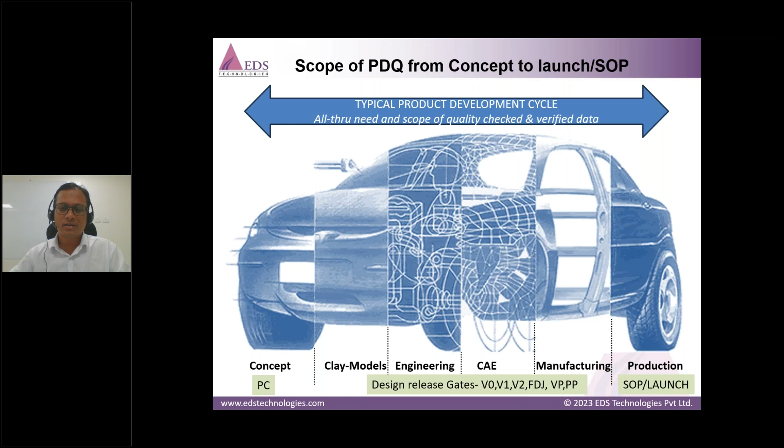Now, in industry, we always say that CAD is the master. It's a buzzword. Everyone talks about CAD, and CAD is the master, like a single language spoken in any industry. Why it is important is that it's at the center point of all the activities, with a lot of peripheral teams concurrently working on the data. The data released can be used by tool makers for making their tools. The prototyping team can make use of it. The tolerancing team can make use of it.

But imagine if the data is not of the right quality, then all these stakeholders will have their activities stopped due to the absence of quality data. So the requirement of quality data starts at the very beginning of the product, and it ends with the product life cycle.

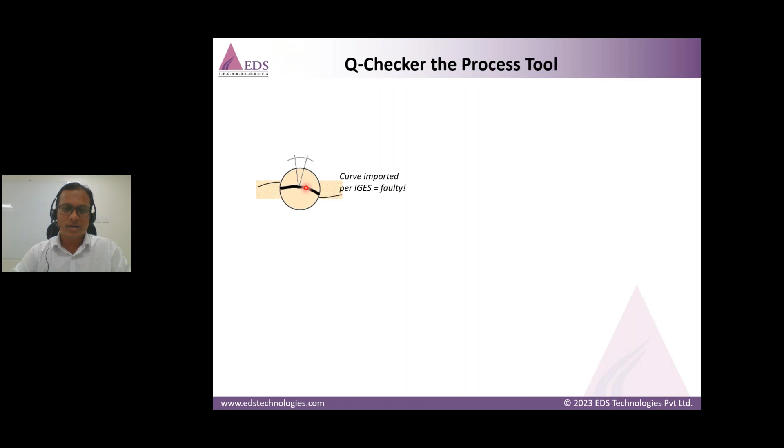Let's take a small example here, a very classic example of how product data quality starts deteriorating in the very first phases. Now, imagine we have an imported curve. Maybe you can consider a door shut line in the car or something like that, and it has some connectivity issue here, like tangency or curvature connectivity, and we didn't notice it. We start engineering the components based on this curve. We make a surface out of it.

Then we do a lot of surface operations. We make a trim or maybe a final output of the surface. Then we have another final output that can be thickened, and we make a final product out of it, which is the final CAD delivery from an engineer.

So what will happen is, if this is not noticed in the very beginning, it can be noticed by the tool maker, who will make a tool out of it, and he will do some tool path generation and machining operations, machining programming, and there he will notice some discontinuity here. So he will ask the designer to rectify this discontinuity and re-release the data. So there is some time associated with it, to repair.

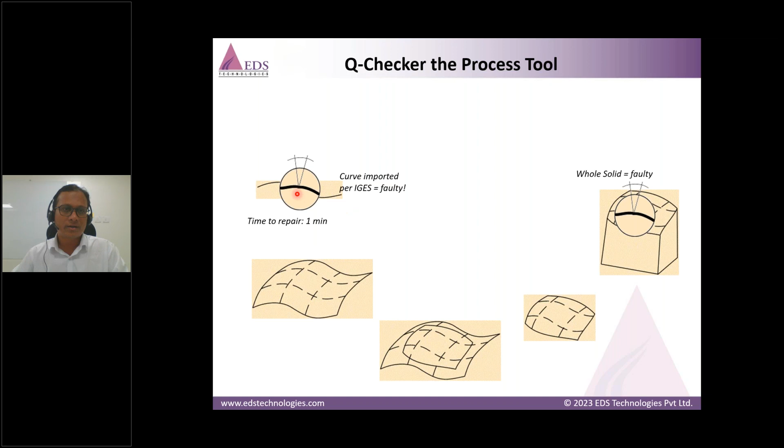If it had been noticed in the very beginning, it could have taken just 1 minute to repair it. If it had been noticed at the surface level, it could have taken 5 minutes to repair it. But if it is noticed at the tool level, manufacturing level, then it takes weeks and weeks and months to rectify the data due to this huge involvement of the process. And it is just one part. Imagine a number of parts put together. So you can imagine the time and cost involved in rectifying the product due to the faulty model.

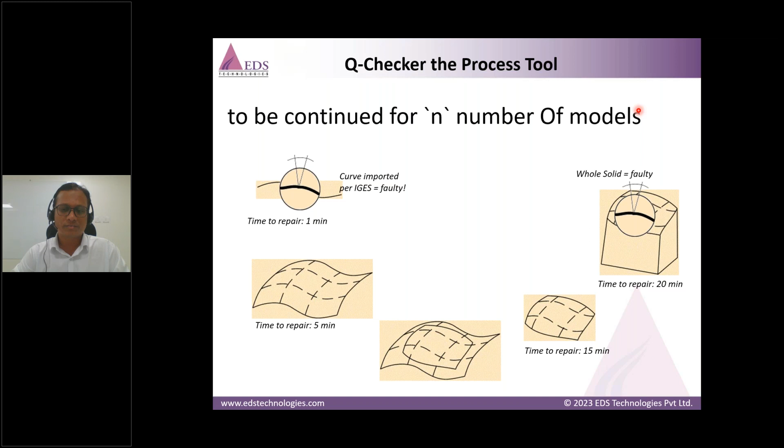We do manual checking as of now in the industry. So this is the way we check our data in the industry nowadays. We have a release checklist, we have a delivery checklist, and we have a drawing checklist. But there are some issues associated with it. It is a completely manual checking process. It's repetitive, it's monotonous. Then it takes a lot of the designer's time, which otherwise he could spend on the actual CAD design work, and focus on the real work.

So this is actually a do and check method, which is a reactive method of doing CAD modeling. However, we should go for a check while doing method, which is a proactive method of modeling. And QChecker helps in achieving this check while doing methodology. Many designers who are freshly inducted in the company may not be aware of any such tools that are available, so they can make fresh mistakes while CAD modeling. And of course, during release pressures, we always say that there is no time for PDQ. We have to just do our work. So that's another excuse.

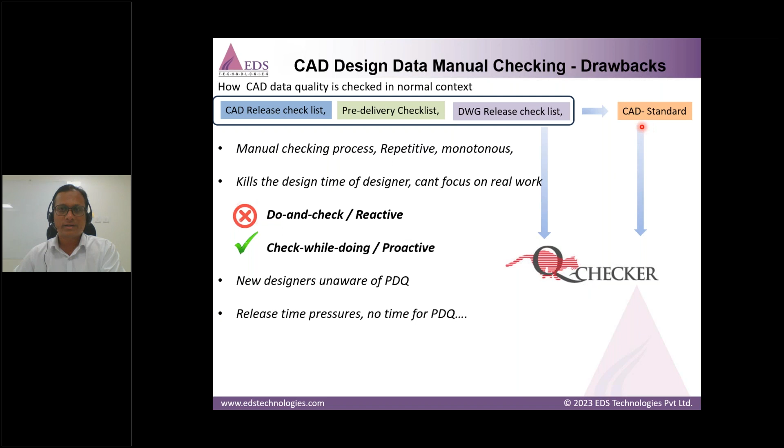But what can be implemented is, we can take all this and make a company internal standard and have this standard implemented in QChecker. So if there is a standard, it can be implemented right in QChecker, and the checklists can also be built in parallel in QChecker as a number of checks. So we ensure the CAD design quality during CAD modeling itself and not check afterwards. So that's the proactive way of doing CAD modeling. And there are around 400 checks in QChecker written by the expert CATIA team within Technia.

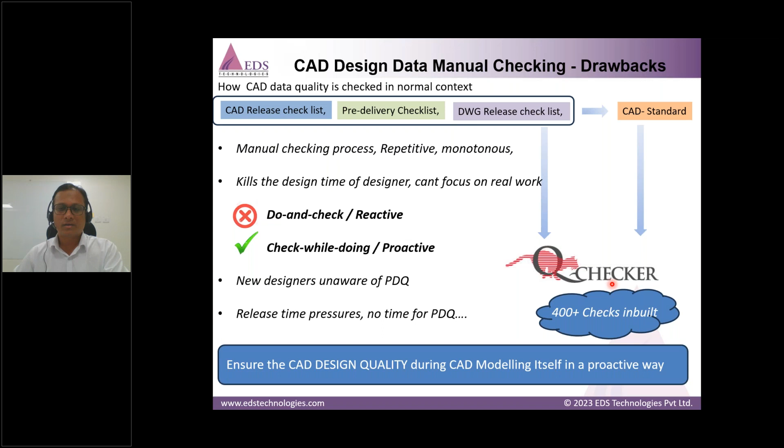Let's take some sample case studies from industry, real life examples. There is a check in QChecker that checks if a specific parameter is available or not. And if it is not there, it can give it as an error. So, for example, if you give this parameter, paint offset value, suppose the paint is around 300 microns thick on the body.

So you can limit that value here, and the paint shop engineer who will do the costing calculations for paint will be able to know the paint quantity and paint weight that will be going onto the body and the cost associated with it. But imagine if this parameter is not there and QChecker doesn't check it, then there is no chance to know the paint weight and the cost associated with it. So we can implement such very advanced level checks with QChecker, checking if certain parameters are available or not. This is just one example of it, which we have faced in the industry.

Otherwise, the other way of doing it is that the paint shop engineer has to open the data, measure all the surface areas, offset it by 300 microns, thicken it, and measure the volume of it. That's a very cumbersome process, but you can just do it with the help of one parameter.

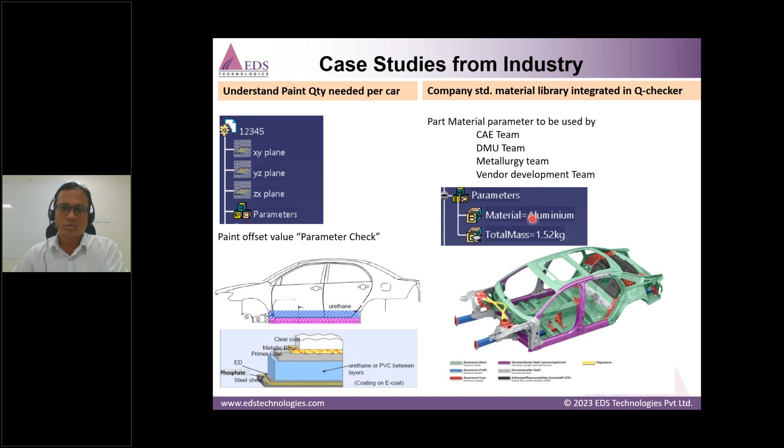Another example: ED coating, electrodeposition coating on the body, very important - it acts as a protective coating. We can have another parameter for it that can measure the surface area of the product, and by that we can calculate the total mass of the coating that will be going onto the product, for example the body here. So the simple QChecker check can be if this parameter is available or not.

And if it is not there, the designer has made a mistake not implementing this check in the CAD model, so that can be triggered as an error in the QChecker, and that can be picked up and corrected.

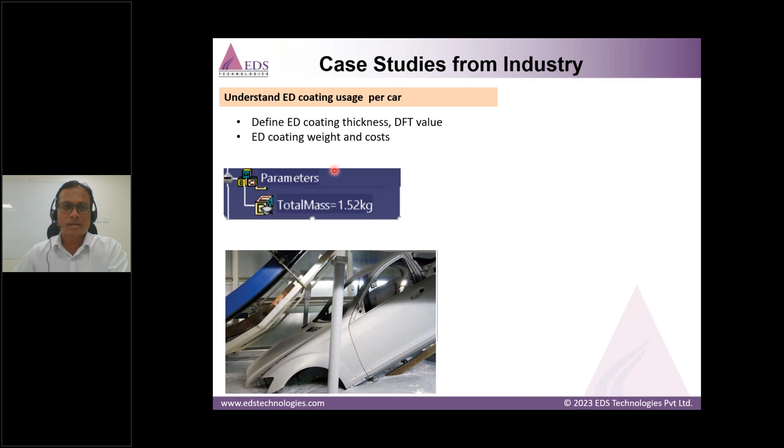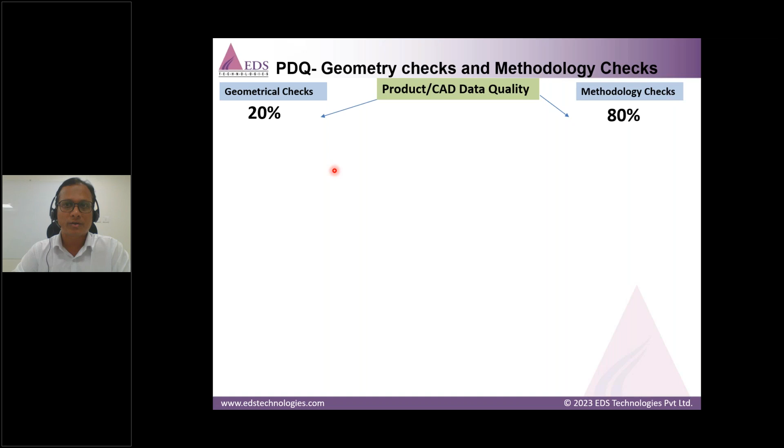What PDQ constitutes is a kind of geometry checks and methodology checks. Geometry checks are only 20% important, but 80% importance is given to the methodology checks that I just mentioned in the above slides. So what are the geometrical checks?

Basically these are simple checks, but very important. Position sketches - as we know, sketches have to be position sketches, and free sketches should not be used, because free sketches can turn upside down, left to right, and create a mess with the part. We should always go for an axis system while creating the part, because the whole part can then be derived from one single point. So Q-checker can check whether it is a position sketch or not, whether the axis system is given or not.

It can limit the size of the model so there is a disciplined approach by the designer - you cannot just make more and more operations and increase the part model size. Then there are checks to hide all the points, curves, lines, planes, etc. before saving, so that our model looks clean when opened in JT or other lightweight applications. It can check whether there is any deactivated feature that the designer has left to update.

And lots of datuming features - it can check the datum sequence of the GD&T symbols also. It can check whether the designer has made some mistake giving fake dimensions. So these are all geometrical checks, but they're only 20% important, while 80% importance is given to the methodology checks I spoke about in the first couple of slides - like paint offset parameters, surface area parameters for ED coating, weights, etc., and whether the material applied is correct or not.

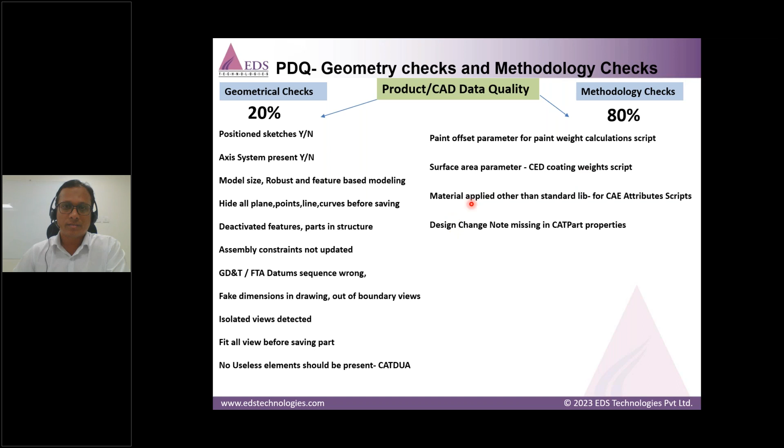Let's move ahead and check another example, a very classic example from Europe. A company in Europe had around €5,000,000 being spent in 1999 when they started, and the management thought it's a very high cost, so they implemented the product data quality philosophy in the company.

They implemented QChecker in 1999, and in the first year there were no apparent gains because there were fewer users using QChecker - not all were trained. So even then the costs were too high. But as the number of users increased, more and more designers started using QChecker across the company, across all functions, then the repair cost started decreasing and the maturity of the product started gaining.

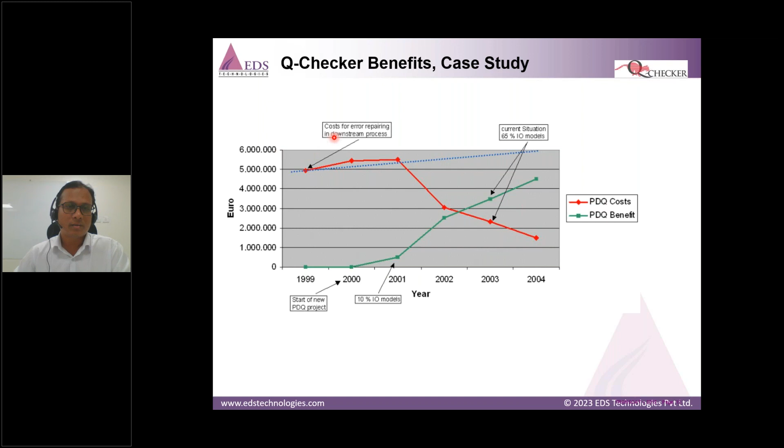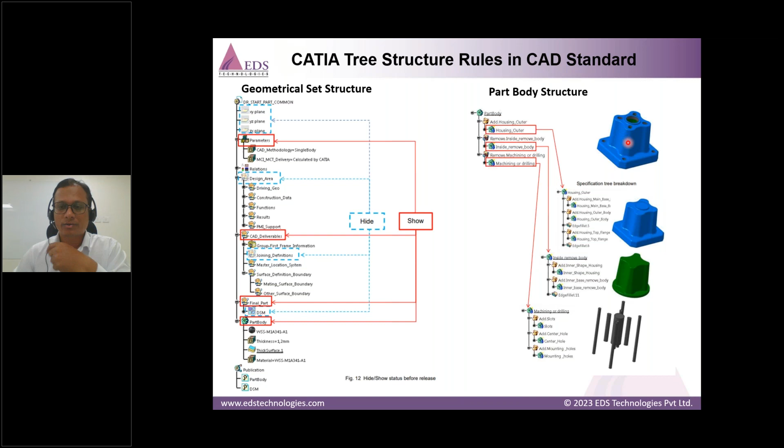Another modeling methodology, like I said before, all bodies should be named. There is a check in QChecker for whether the bodies have been named correctly or not, or whether it's just left as body 1, body 2. Because in a hurry, many designers make that mistake - they just create the body and don't name it. So any new designer who starts on it faces troubles while updating the component. QChecker can help in this methodology check also.

Let's look at some very interesting checks that QChecker can help you with in product development, saving the headache of maybe hundreds of designers at a time.

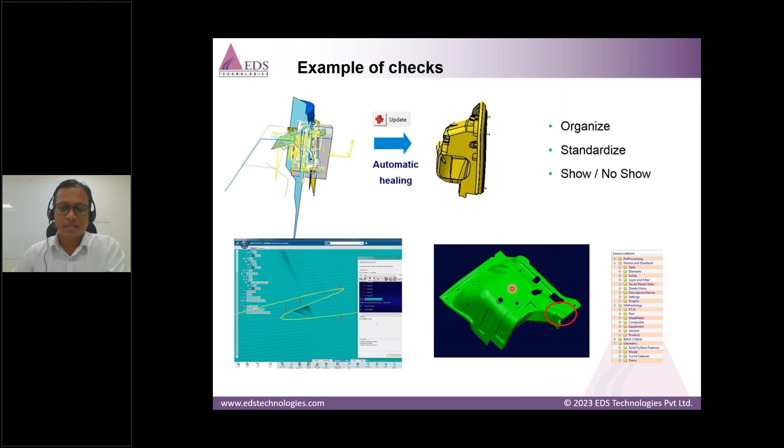Let's look at an interesting comparison of how we relate traditional methods to how we do things now. Previously we used a lot of 2D drawings, and cars were being made that way. In inspection, we used to measure with verniers and micrometers. Then came 3D coordinate dimensioning, which is easy to understand, explain, and communicate, with no problems - but this is still coordinate dimensioning.

On similar lines, we have release checklists and CAD standards in the form of Excel files, which each designer has to check his designs against to verify correctness. But these are old days, maybe 2-3 decades back - that's how business used to happen.

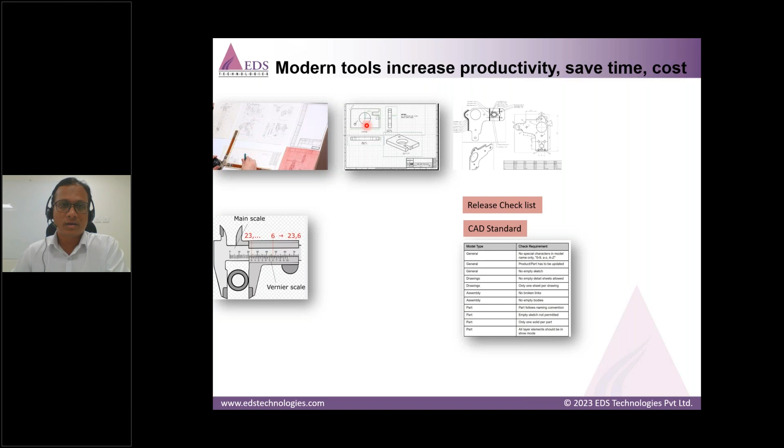But nowadays we don't do any 2D drafting - we always go for CAD design, which is a productivity improvement. Nobody now uses physical measurement tools; we all go for gauges and CMMs, etc. - another productivity improvement.

Similarly, for coordinate dimensioning, we moved to geometric dimensioning, which has a huge benefit of almost 57% more tolerance than coordinate dimensioning. That's why we get more tolerance to play around with in geometric dimensioning, so we easily adapted this modern tool of doing engineering.

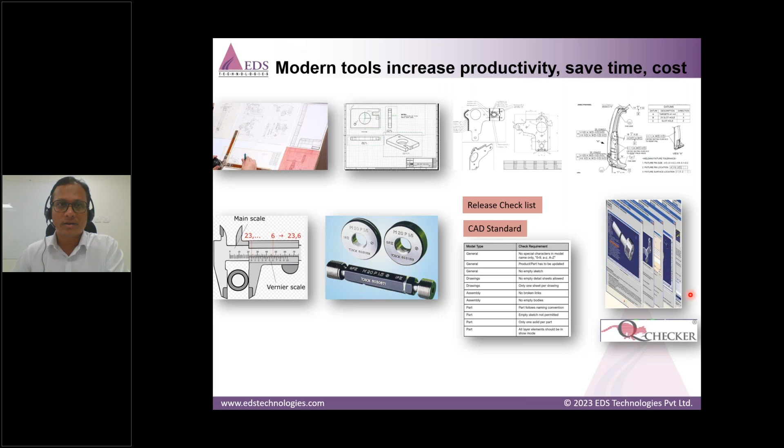On similar lines, what we offer with our product is that we can get rid of all this manual process of checking and losing time and effort. We can transfer this entire process to QChecker and let it handle all the checks itself, in a short period of time, very accurately, with a lot of checks performed inside it. I hope it makes sense as a modern tool to increase productivity and save time and cost.

Let's check some standard checks that are available. There are around 400 checks available in QChecker, written by expert CATIA users and the Technia team.

This is a solid wall thickness check, very important. It will give a band where the thickness is below a certain value, which you can set in QChecker, whether you want it 1 millimeter or 2 millimeter. Imagine this is a plastic component or a stamping component with a pierced hole, which needs a certain bridge amount, otherwise the dies can crack inside.

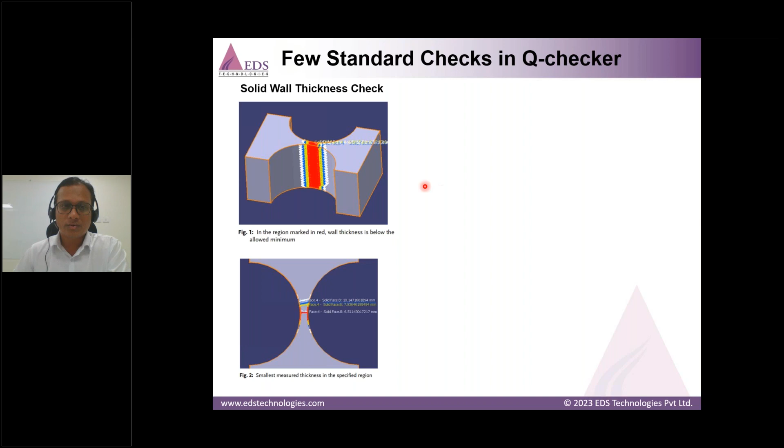So that kind of check can be available here. It's very useful for plastic components where we have variable thicknesses, and due to certain operations, the thickness can go drastically low without the notice of the designer. It's a very important tool, readily available in QChecker.

It has a check to check inside cavities and voids. For example, there's a connecting rod with a void inside. Imagine the repercussion of this: the weight of the connecting rod can be misleading due to this void, and the costing can go wrong, and even mass balancing can give very wrong results.

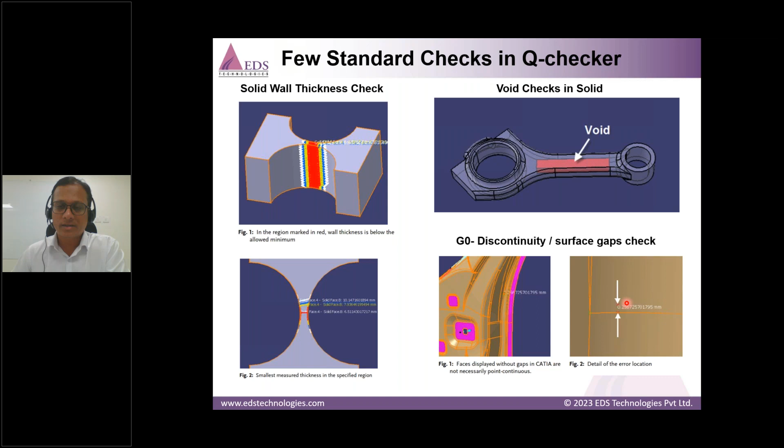There are some ready checks for checking discontinuity - G0 discontinuity, point discontinuities. There's a gap in this panel, the body side outer of a panel. There's a gap here, but the designer never noticed it. Nobody noticed until it got released and came back from the supplier, the tool maker, saying there is a discontinuity. Then he demanded a re-release of the part, which again takes months.

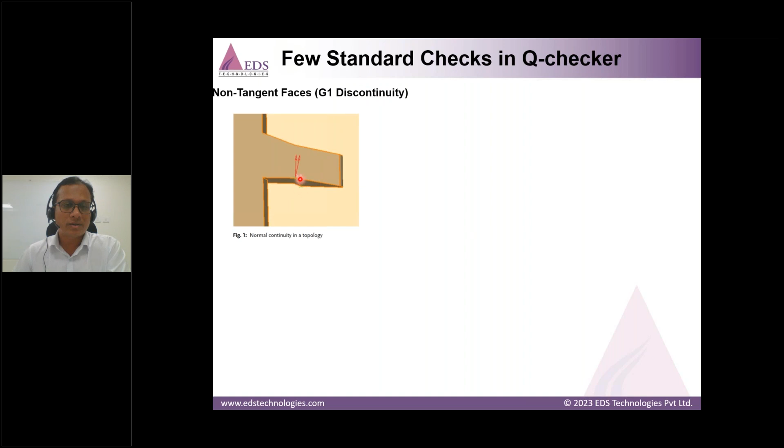Similarly, a G1 discontinuity here - there's a sharp line which should have been smoothened and filleted. It can check that also. Curvature discontinuity, G2 discontinuity, it can check readily. It's a ready check available.

Self-intersecting surfaces and solids can be readily checked with a click of a button. Very important, this is never noticed during the creation of the modeling, but it's observed when we try to thicken the component and do the object out of it.

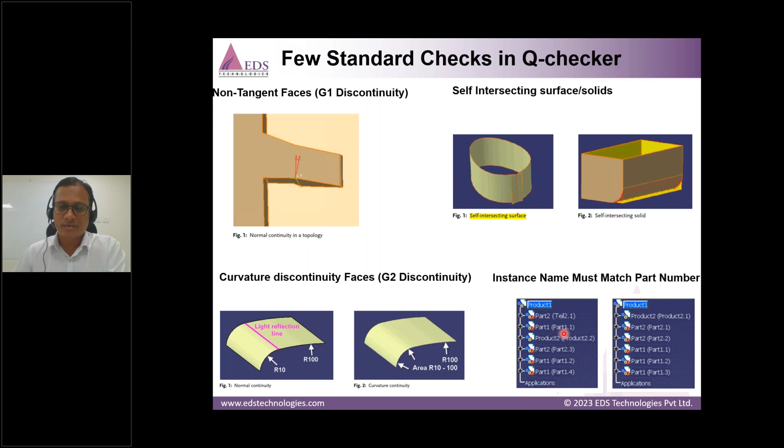Instance name is very important when you have a lot of parts inside the product and they are not arranged in the right order. QChecker, within a click, can create the right order of the component. For example, the instances have been named one below the other, so we know how many quantities are there, and we have a very clean structure inside the product.

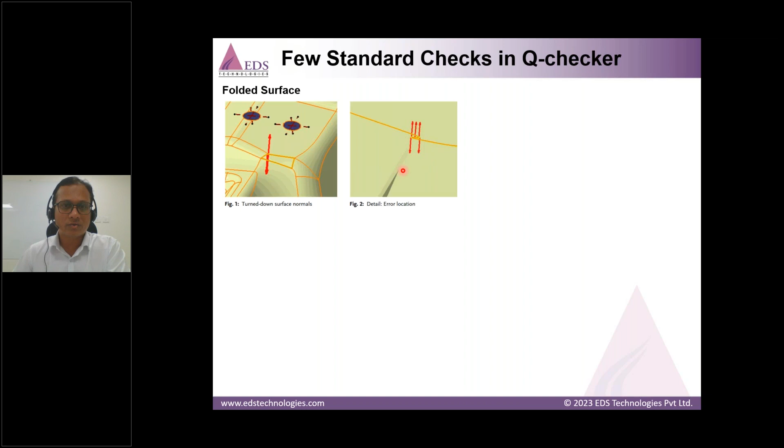Some other checks, like a folded surface here that the designer never noticed - however it came back from the tool maker saying the surface is not correct and the tool cannot be made out of it. This is a ready check available in QChecker.

Tangent discontinuity, G1 check, can be checked immediately as a ready check. Self-intersecting wires can also be checked. The designer never bothers about it, but it can be checked with the click of a button.

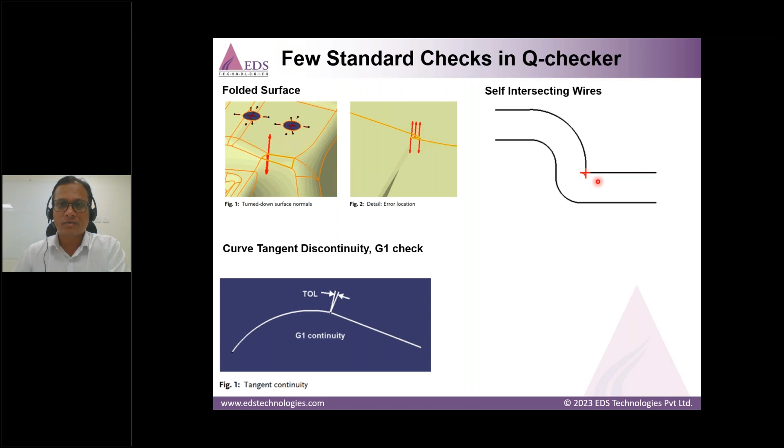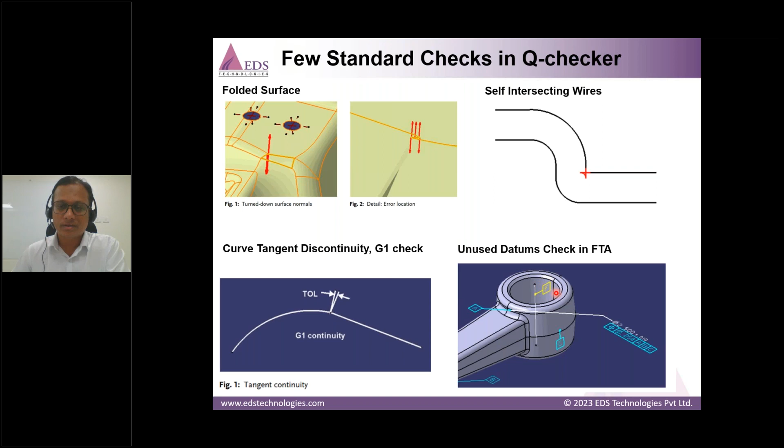There can be some unused datums, not used previously - the datum used to be like this, but due to a new dimensioning or tolerancing methodology or datuming system, the new system came in place and this datum became redundant, but the designer misses removing it. Q-checker can check the deactivated or redundant datums, and the designer can then remove it.

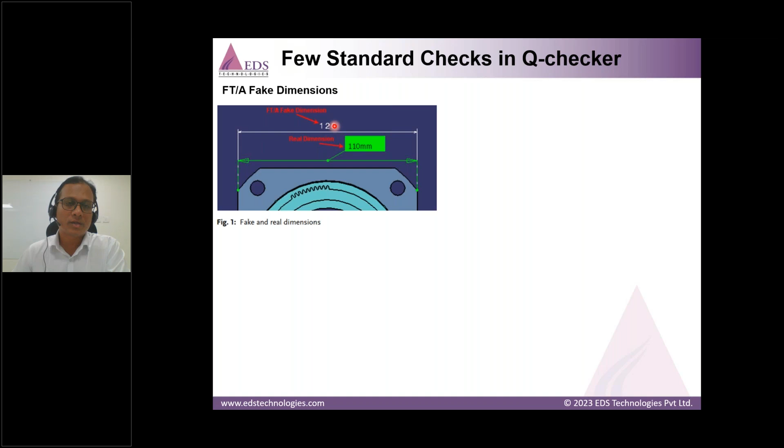Another one in FTA, 3D PMI or GD&T - a designer can give a fake dimension due to release pressure just to meet release timelines, but it can be checked very early in the process, so he's relaxed that yes, we can easily release the component.

In the captures also, in 3D PMI or GD&T, it has a ready check like the capture names must match the view names to maintain sanity, to make correlations between the two. Very important, very important this is actually.

FTA standards - any company can have maybe ASME. A lot of companies choose ASME Y14.5M GD&T standard, but some companies in different industries go for an altogether different dimensioning GD&T standard. So you can set your standard and check whether it's being followed in annotations, text dimensions, and text symbols, etc.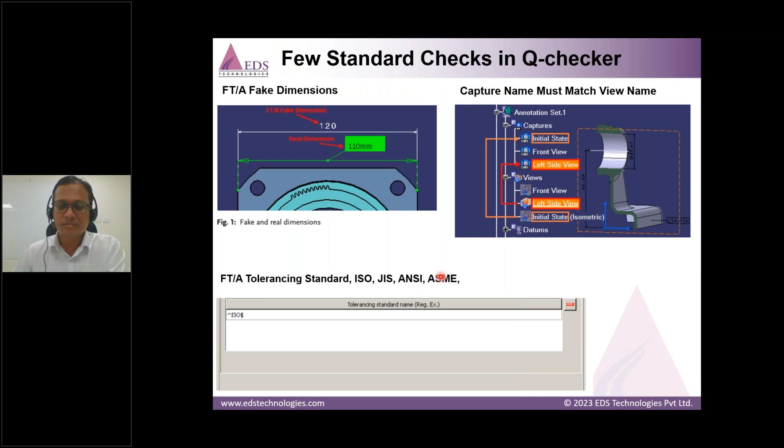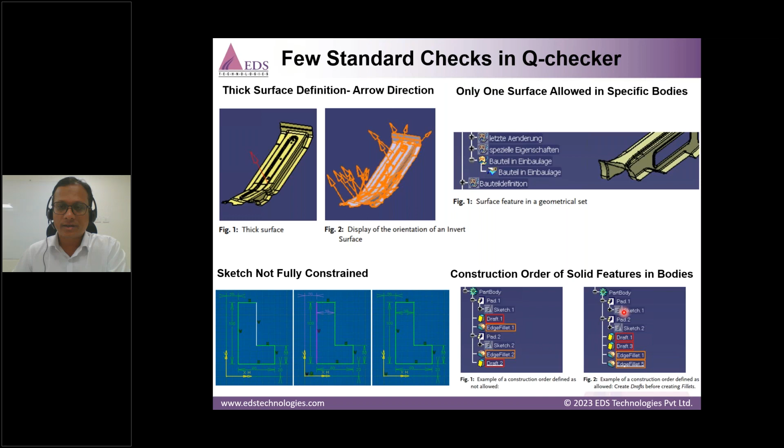Construction order: it can detect that the designer cannot really go for any haphazard modeling methodology. He cannot first fillet the component and then give the draft. It's a wrong method, so it can detect that sequence also very easily.

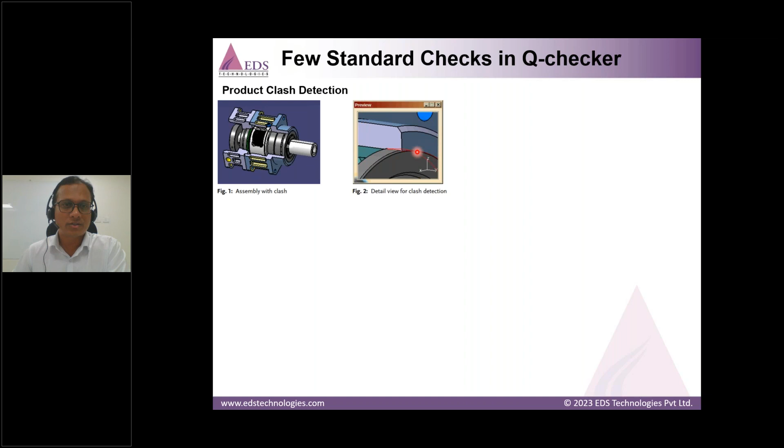Clash detection is one of the beautiful, very robust checks in QChecker, so it can check whether it is touching or clashing. No show commands, as I showed: if you click the healing button, it can turn this mess into a very clean model visible in the JT files or maybe lightweight applications.

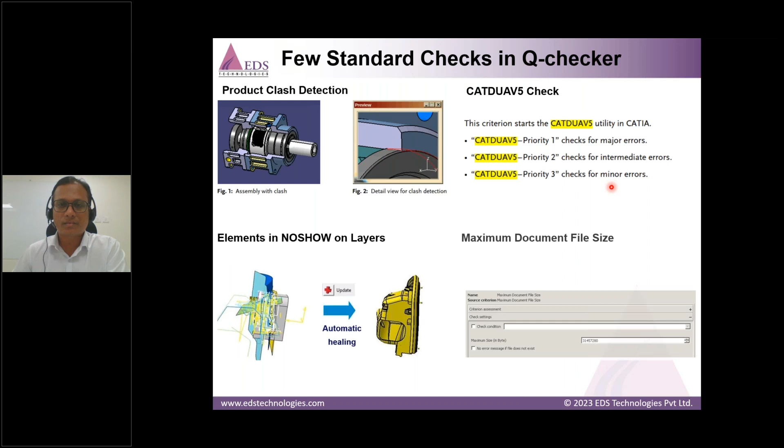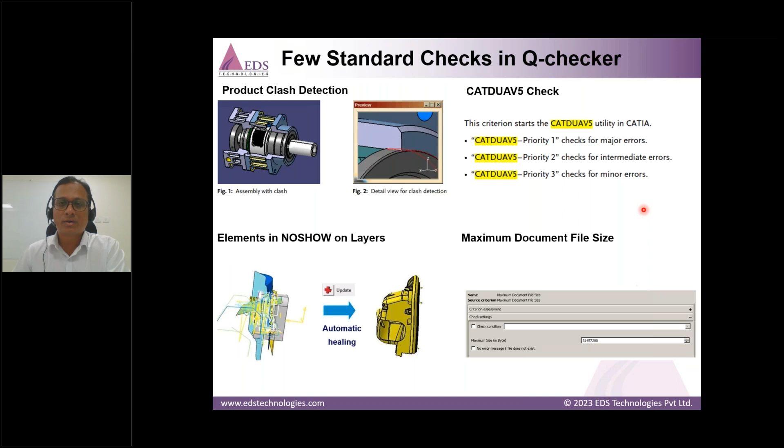Then, as you know, CATDUAV5 it can perform inside QChecker. You don't need to go for CATDUAV5 utility and do the CATDUAV5. You can repair all the major checks, intermediate checks, and minor checks inside the QChecker application. You can limit maximum part size to maybe 50 MB or 60 MB so that there is a discipline that is followed by the engineers to do the proper CAD modeling when they are modeling the components.

You can set the value that your company or organization chooses, like millimeter. He cannot give dimensions in centimeters or meters. So it all has to be measured in millimeters only.

This is very important, related to general notes in any drawing. Any product has a drawing and it has general notes where a lot of regulations, a lot of test parameters, a lot of inside company standards are written. So the company chooses to automate that all with the help of CATIA parameters, so that there is a check in QChecker that checks whether the text in the general notes is derived out of a CATIA parameter. So that linkage it can check.

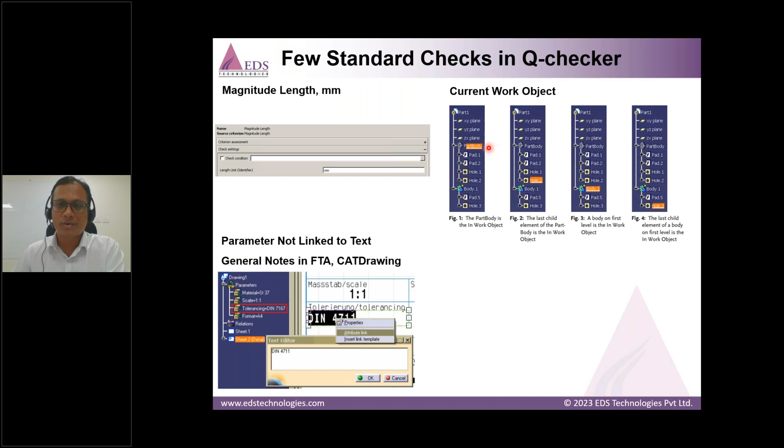Current work object, it is a very useful check. While designing the component, the designer can be inside. It should technically be over the part here to show the finished component, but he can be inside the model somewhere, and this data can go wrong if it reaches the supplier or tool maker. So it checks, and there is a healing option available. If QChecker notices it, by the healing operation it can make the part body the current work object.

It can check how much character length of a part number or part description you can allow. For example, 1 to 25. So this check allows just 25 character length of the part name nomenclature. So there is a disciplined approach while naming the components.

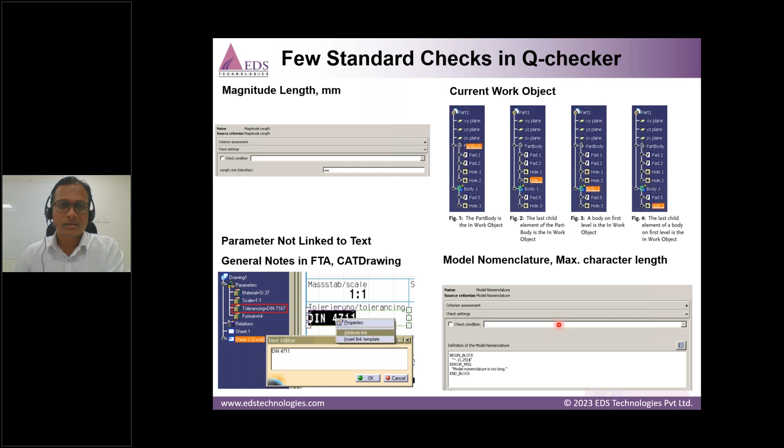Yeah, with all this, I hope I'm making the context very understandable. So let's check when QChecker got introduced, how it got applied and invented. There is a company in Germany, Technia, which is a developer of this software in conjunction with Dassault Systèmes, and it works primarily on the CATIA applications. It focuses on ensuring the quality and compliance of CAD data and models, and helps maintain CAD standards, detect early errors, etc.

In 1990, they started with very few checks, a very minimum number of checks just to validate the application. Then in 2002, a lot more checks were added, and it was made available for CATIA applications. In 2006, the standard components to embed QChecker in PDM started, and in 2007, QChecker 2.0 enhanced the interactions with results. The new 2.0 version released. And in 2009, it was made available for CATIA V6 to dedicated customers just for checking the primary usage.

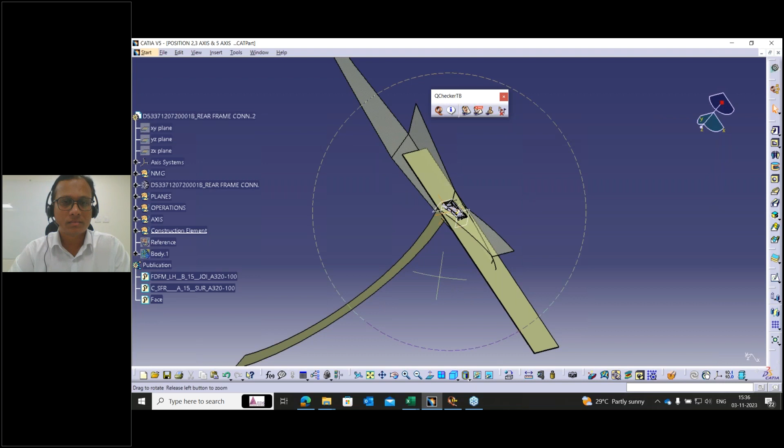For the live demonstration, let me go with a small example. This is a model for the rear frame connection part. Here I have created a body along with some operations, planes and axes, some publication elements and construction elements. With the help of this, I made a small machining part. We'll see how this PDQ system is helpful in terms of data quality. Let me run the PDQ system just by clicking this icon.

So we all know that every design company, manufacturing company, when it comes to method, we have a checklist. We have SOPs. When it comes to the design CAD data, we have a checklist. Again, it differs from company to company. Let's say a CAD system. These are basic steps. This is for one of the OEMs.

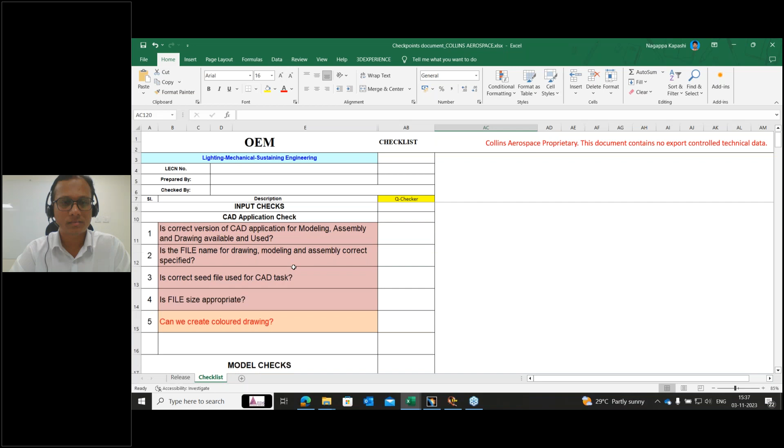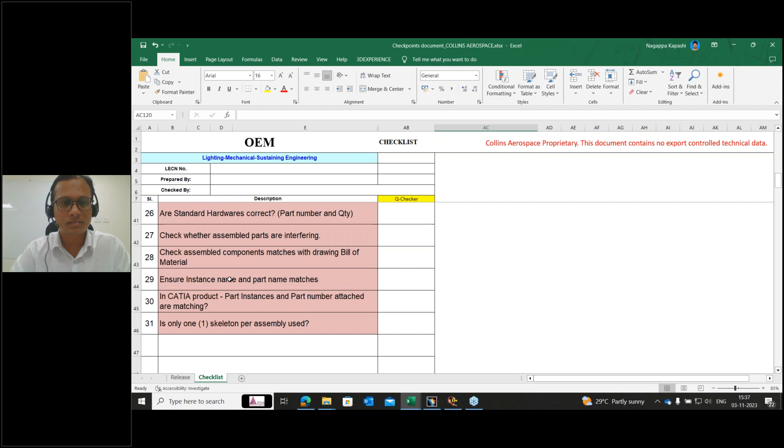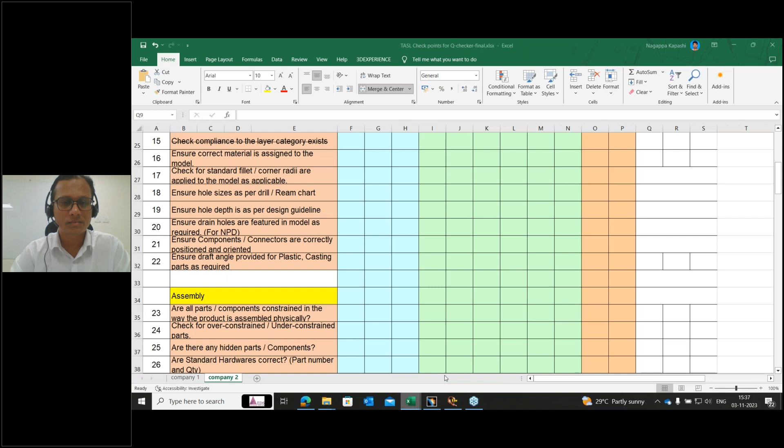When it comes to the model, related to part design, we have a list of checks that need to be checked for all the parts. When it comes to assembly, again we have a lot of checks that need to be checked before sending to our senior member, or the one who owns the product. So this is a checklist. This is a different company example. We have a checklist for the part, for the product, all these things.

After completion, we need to do a self review of all the checks, whether a particular model is following all the checks or not. After the self review, we need to send it to the final review for the manager or supervisor or anyone who is reviewing it. At the end, it goes to the main product owner. He'll come back with the defects, minor defects, major defects. When you're in the process, it's an everyday activity. We try to eliminate all the modeling errors at the very first stage.

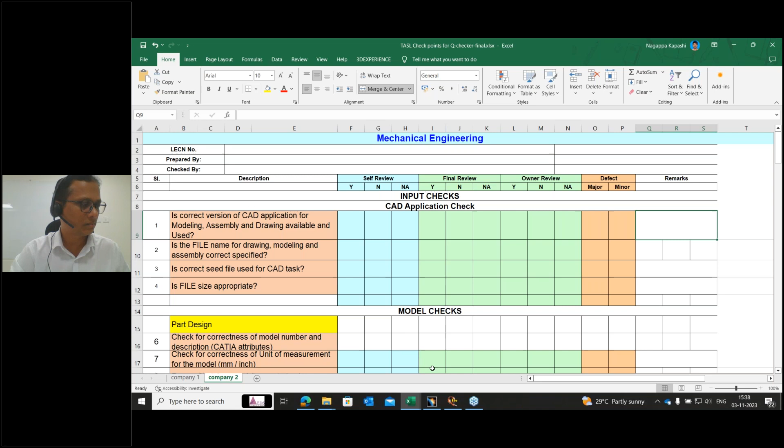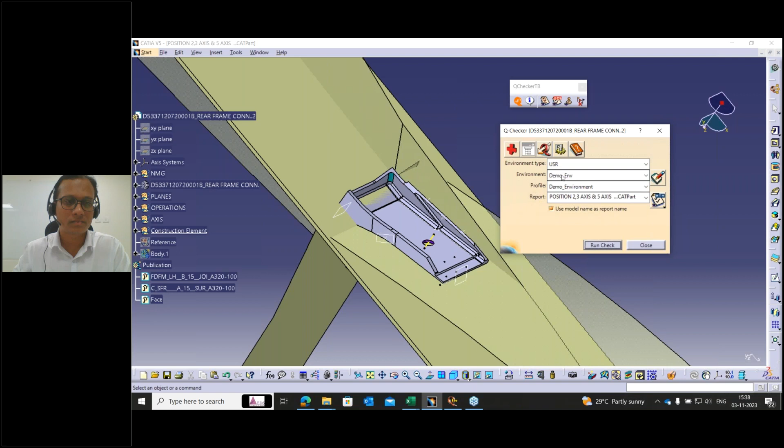After clicking this, we have an additional window. All we need to do here is select a proper environment and profile. The environment profile talks about your checks. Every method, every process will have its own checklist. Here we are selecting based upon our project. So the environment may be different.

Maybe if you supply for many OEMs, it may be Airbus, Boeing, and so on. There are many OEMs. Again, when it comes to Airbus, we have many variants as well, like A220, A330, A350, A380. We need to select a proper checklist for a particular project.

For the live demonstration, I have selected a small demo environment. Let me run through this. We'll see how it throws the modeling errors related to this particular model. You can see this is the window which opens right after running the checker. It ends up with a weightage of this much. Can you see this, the permitted element types in show.

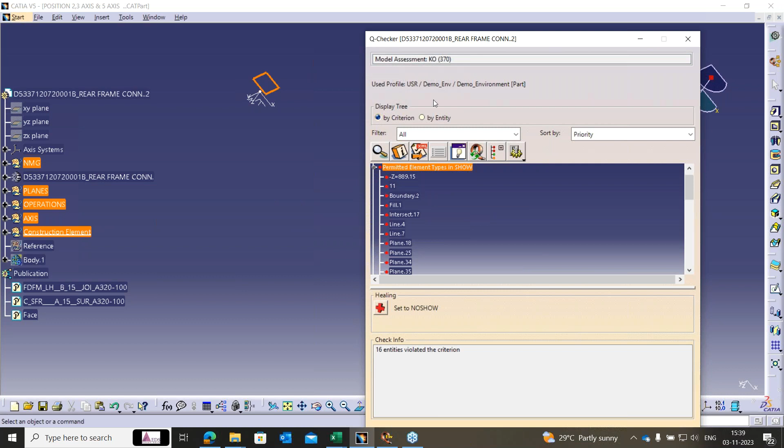So every model, when you try to send it after completion, you need to send the model to your supervisor. So only the important things have to be in show mode. Now we can see a few of the elements which are showing here: the planes, the lines, the points, everything in show mode. So how will the PDQ system help to eliminate all these things in a shorter time? Just select it. As Sushil sir explained, we have a healing option. No need to go back to the model and rectify it. Just by clicking this, all the unwanted elements get hidden. It will go back to hidden mode.

Now you can see the sketches. Our sketch should be fully constrained. It should not be over-constrained or under-constrained. It should be fully constrained. Now it's highlighting that a few of the sketches are not fully constrained. You need to rectify it before sending our model to our supervisor.

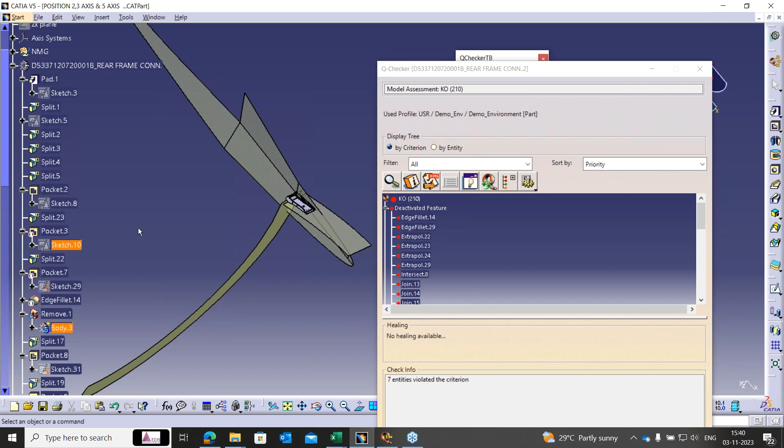Along with that, it's highlighting some deactivated features. So these are all our deactivated features. We all know that if the model contains deactivated features, that leads to a big issue when it comes to the EBOM or MBOM. We may get a variation of the weight. We need to rectify our model at the very first stage and eliminate the unwanted features associated with our model. Now the VDA system is highlighting all these deactivated features. With the help of the healing option, we have two options: either you can delete the unwanted feature, or you can activate it. This is a model which is associated one to one, so maybe you need to rectify it one by one.

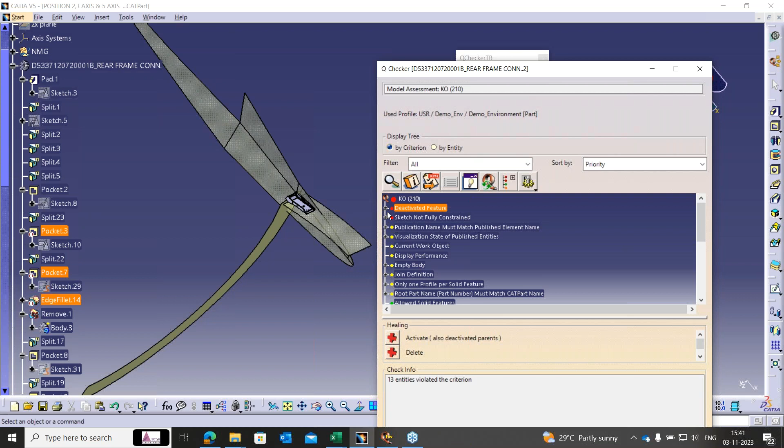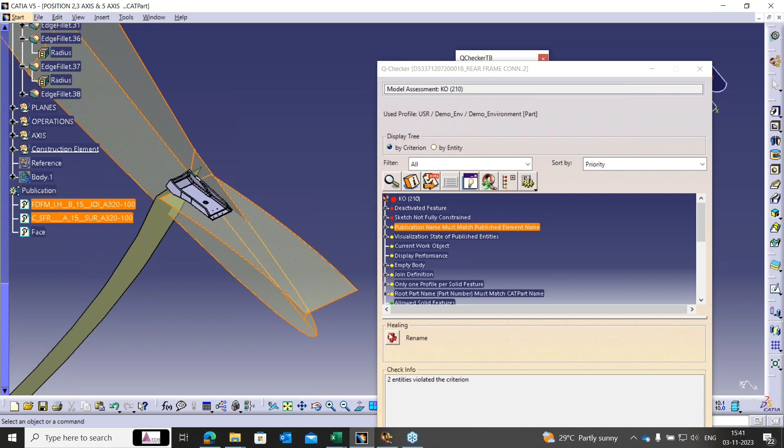Again, here, the publication. The model will have a publication as well, generated from our NMG, numerical master geometry, the reference element from which we made our model. As the check says, the publication name must match the published element name. Here you can see this ends with underscore one, but our publication doesn't have any underscore. You need to rectify it with the help of the healing option. Just select this and click the healing option, it will get rectified. You can see the updated value gets added.

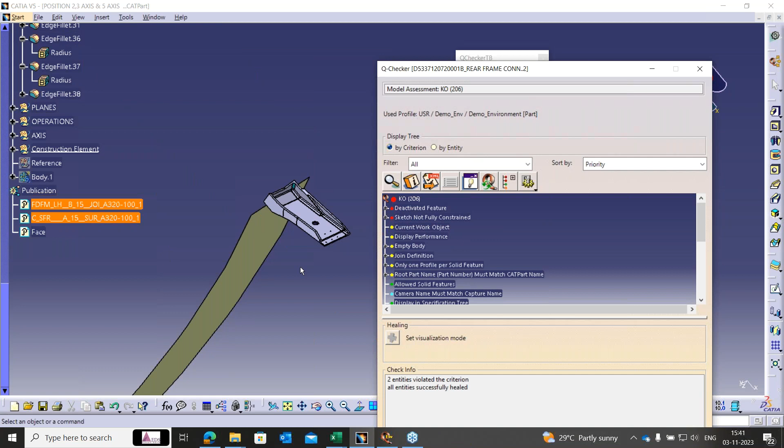Can you see this, the visualization state of publish elements? All the publish elements should be in hidden mode. Currently it's in show mode. So just select this and hit the healing option. It will go back to the proper state. Now you can see the model. What we saw just before, the model was showing points, lines, a few elements along with the surfaces. So with the help of this VDA and the healing options, in a very short amount of time, we are rectifying our model.

Again, you can see the current work object. We all know that only the part body should be the working object, because it contains all the rest of the features. Just click the heal option. Now it's switched to the main part body as the working object.

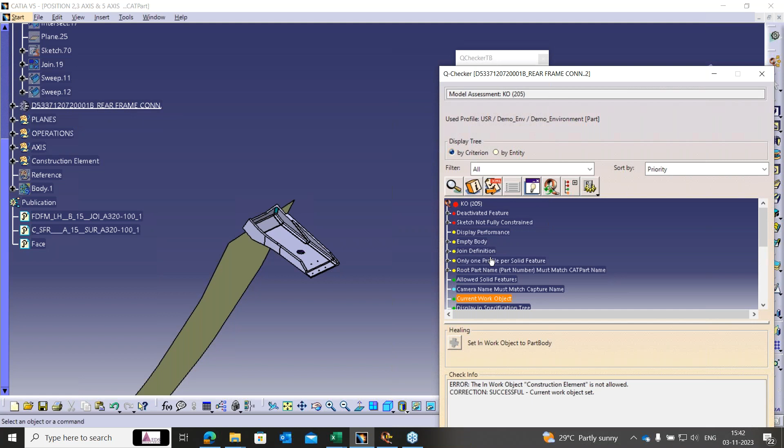Again, go back to the display performance. We all know that from system to system, the display performance varies. Also, we used to get models from our suppliers or the OEM. All our settings should be similar. They should match so that we can visualize a proper model. No need to go back to tools and settings to rectify this. With the help of this VDA system, you're just one click away from the results. So all the settings get added.

Now you can see our model, along with the features and the useful elements, also has empty bodies in it. As Sushil explained, we need to maintain and create our model with a very small size. If you go with unwanted empty bodies, the size of the part becomes bigger, which leads to complication. You can just delete it. No need to go back again. As I said, in the healing option, just delete.

So can you see this? We have added one more, the join definition. It's stating that the merging distance does not match the requirement. If you want to know exactly what the allowable value is, just click this particular option. So this is the criteria. The allowable value is 0.08. So we need to go back and rectify.

So the allowable value for this particular surface is 0.08. Once it comes under the allowable value, the checks will be passed. Then we'll go with the only one profile per solid feature check. When you expand, it will again highlight. No need to expand the tree structure. Just expand it here, select it, and make it center graph. It will take you to the particular model.

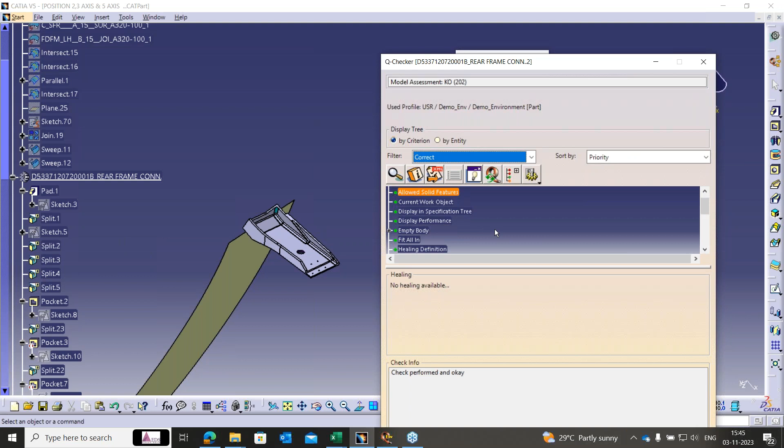After running all these things, we have a filter. Just filter it to see the corrected things. In very little time, maybe less than a minute, you rectified all the errors associated with your model. Now the model is ready to send to your senior supervisor or any downstream applications. It's not only limited to hiding or showing details; it's also very important that you set your parameters as well.

When it comes to the join, we have so many options here. Based upon our manufacturing facility, we need to work as per our requirement. If you uncheck all these options and create your model, that leads to complication. When you send a model to your CAE engineer, he needs to rectify the model and spend a lot of time on it. So if your check involves all these things beforehand, it's very easy for the CAE engineer to go directly to his functional work. He directly applies the load and gets the result. So it's a one-time activity.

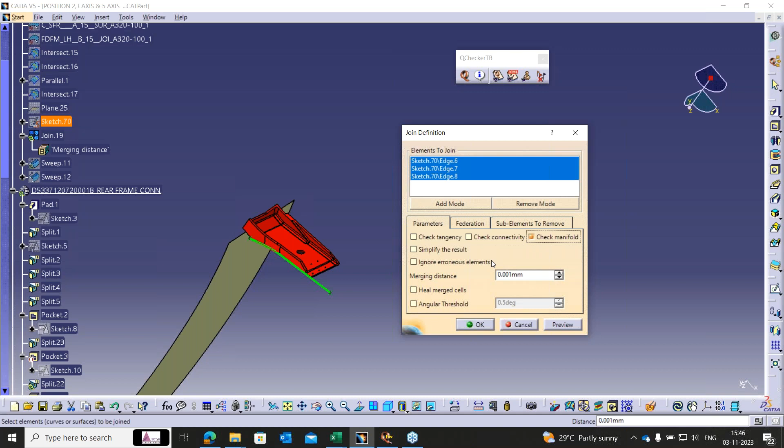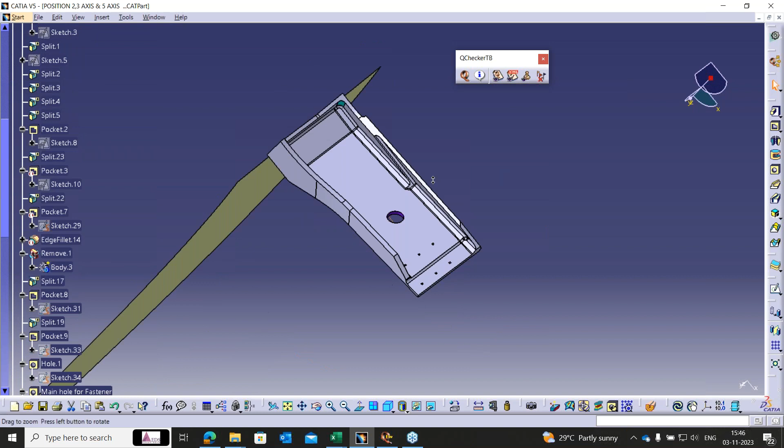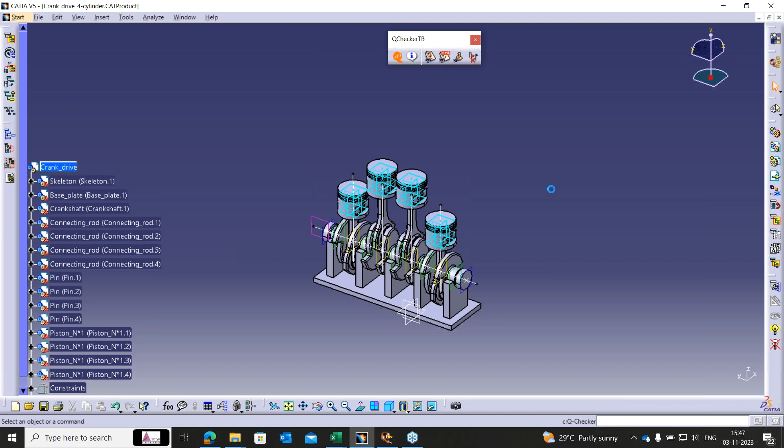This PDQ system is not limited to only a few models. It's related to your part body, your product, your drawing, your processes, your sheet metal processes. And it's not limited to only one process or method. You can use the Q-Checker for all your different projects and methods. As you know, every process involves its own checklist. Create your own checklist with respect to your different projects and run it. As you can see here, I have created multiple environments in the PDQ system related to different projects.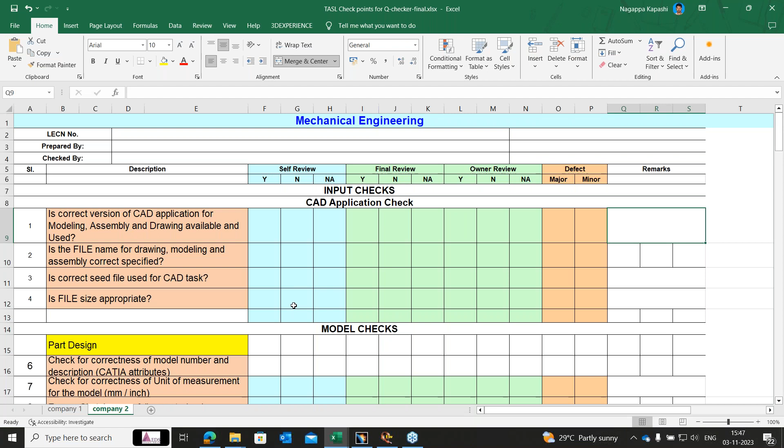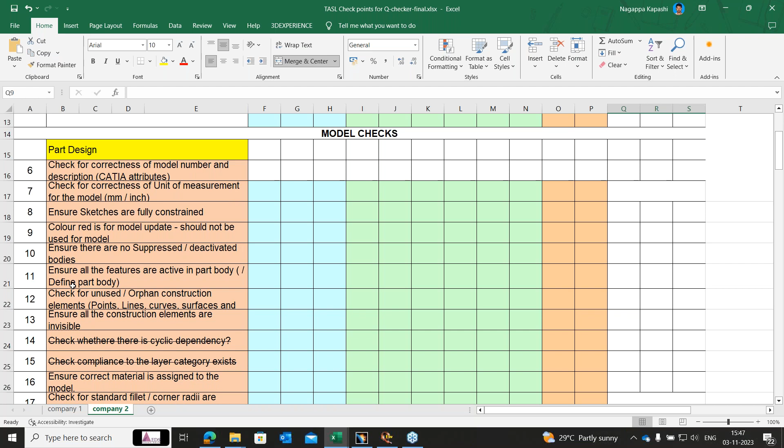We all know that we are manually going through all these Excel files. It's very difficult with the naked eye to rectify everything, because it's an everyday task. It's human tendency to miss something. So we have an automated tool. With this, we can rectify all our product data quality. Now just select this and run it.

This is how it's throwing the result. Now these two are passed. And it's also throwing errors related to this. When you expand this, it's saying 4 entities are violating. What is this? The product component with deactivated features. The product should not involve any deactivated feature. It should be fully linked to each other. When you expand it, okay.

Can you see this? So this particular product has deactivated features. In our PDQ system, we have added checks so that it should not allow any deactivated features. Just by selecting this, just by clicking the healing mechanism activate, everything gets rectified. You can see everything gets healed. Before, we had only two passed. Now this one is also added.

Now here it's highlighting something like product clash. When you expand it, it gives between what parts it's clashing with each other. When you go to the details here, in the backend we added between all two components, between loaded components, and we have mentioned the value it has to check within 5 mm, the clash contact clearance. This is how it's checking in the PDQ system. So this is about your product. When I run it back,

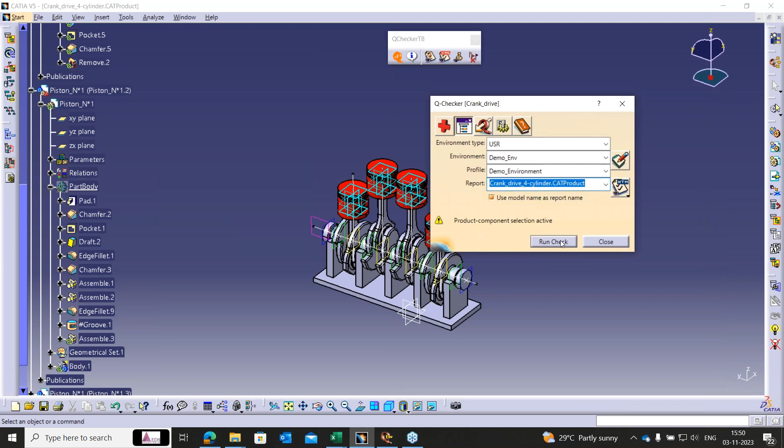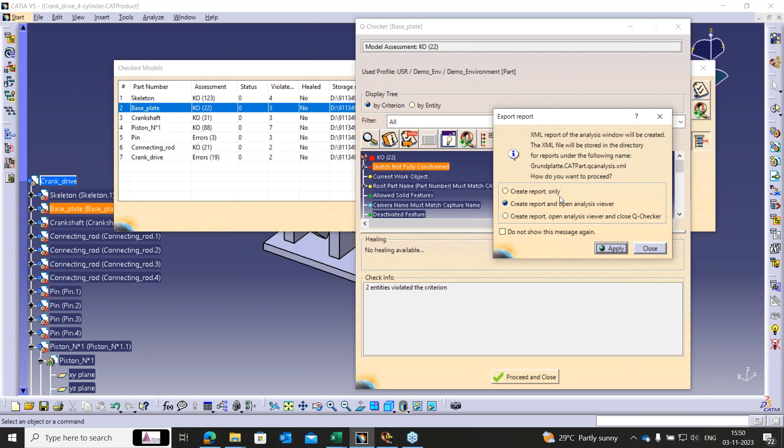Just by running it, it's running for all the products, which includes products and parts as well. It's throwing a consolidated result for the particular product. If we need to run it for the individual part, we just need to select and run it one more time. This is throwing an individual result for each part. We also have a report generation capability, in XML, HTML, or a text file. You can generate your report based upon your required format. Closing it. So this is about product.

I'll take you to the drawing, how it throws the result for the drawing as well. Drawing is very important for everyone in the manufacturing industry, since the drawing sheet is flowing through the downstream. Let me run it for the drawing as well. Through the naked eye, it looks fine. It contains a detailed view with 2D components, multiple views, the dimensions, the notes and the title block. It all looks fine. We'll see how it throws the result when you run the system for this particular drawing.

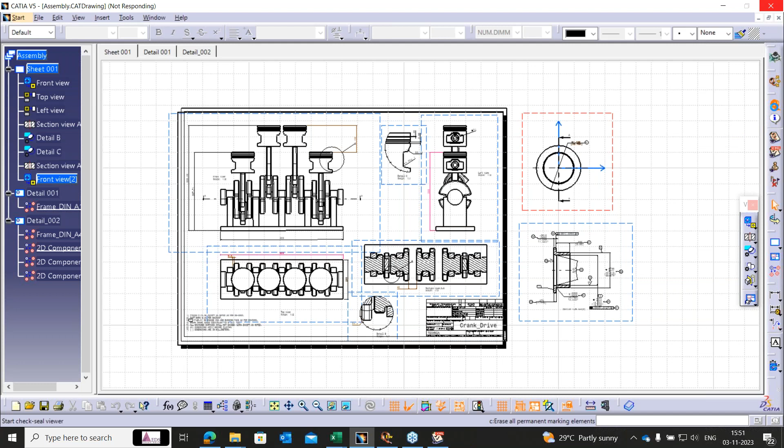Again, I'm selecting the same demo environment for this drawing as well. Through the naked eye, it looks fine. All the views, everything is fine. When you run the Q-Checker, it's showing the result like this. Here I'm adding multiple checks. Can you see this? The permitted text fonts for all my notes should be proper. Here you can see it's not allowing; 98 entities are not validating. Just by clicking this, it will rectify all your 98 entities in one go. You can see it's come down to the green value.

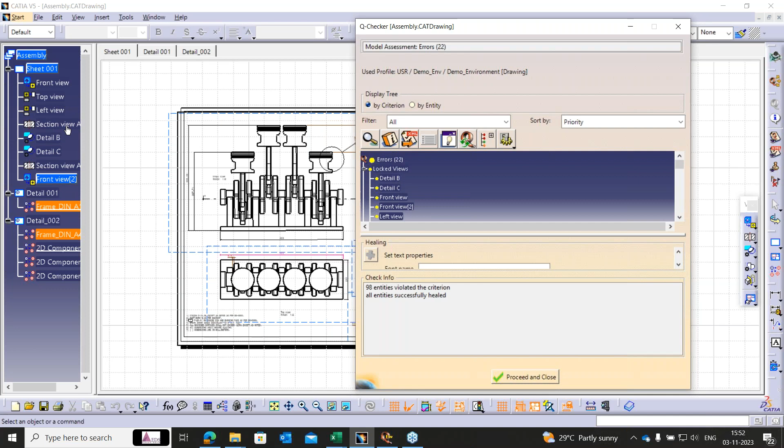Now again, all drawings should be perfectly locked. All views should be locked, but you can see the log showing all the views are unlocked. Normally you need to go back, select individually and lock it. Just by selecting this, we have healing options to switch back to a permitted state. Can you see the result? It's locking everything.

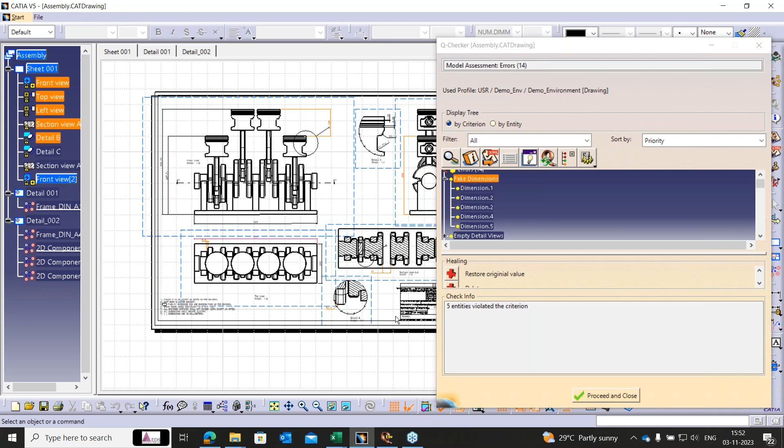Along with this, I have also added checks related to fake dimensions. You know how the fake dimension leads to a big issue in industry. Now all this list of dimensions is associated with fake dimensions. It's highlighting everywhere here. Can you see this one, this one, this one? In the healing option, we have two options. You can restore your value to the original value. Can you see this particular value? This is 398 and this is 136. We'll see how it works. I'll just go with restore the value.

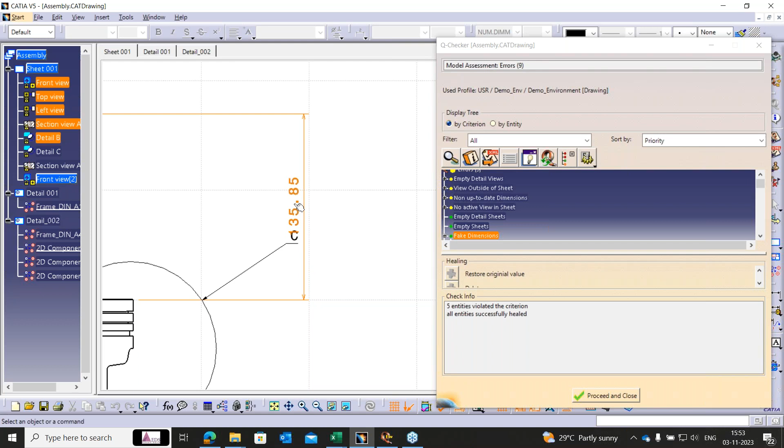Now you can see every engineer trying to round up their values, but this could be a weakness since it may take a lot of time to rectify. Here, it's trying to round up the value, but the actual value is 35.85.

Now you can see it's moved down to the proper corrected check. All of these are passed. Now I'll go with all. Still, a few of the checks are violating as per my design standards.

Now you can see the empty detail views associated with this particular sheet. When you expand it, we have these 2D components which are empty, not being used at all. Expand again, you can see these are all empty. So again, it's not useful to my drawing, I'll go ahead and delete these particular features.

We also have views outside of the sheet. As we all know, when you create a drawing with a proper template with a title block, all views should be within our view frame. Now we can expand it. All these three are violating, coming outside of the view frame.

But in the healing option, we don't have an option to bring it back to the view frame, we only have the option to delete it. So it's needed to go back and rectify, and place it wherever the relative position should be.

Again, you can see the non-up-to-date dimensions. If you expand it, these two dimensions are not up to date. Just select it, and if you feel it's not up to date or not associated, just delete it.

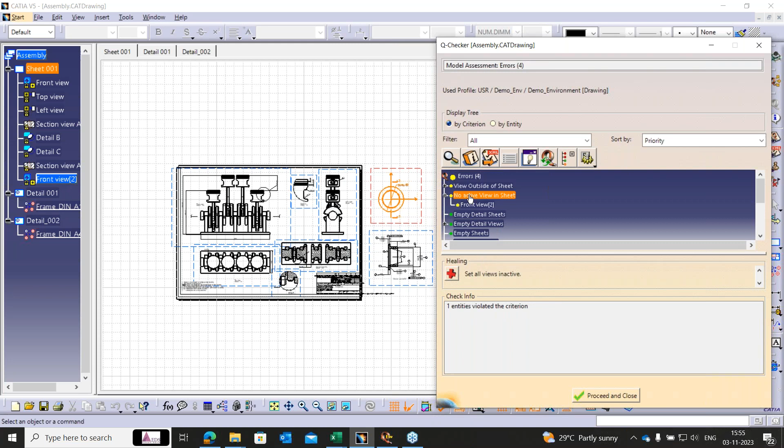No active view in a particular sheet - what is the sheet supposed to be? It's stating there's no active sheet, so you can just delete it. Actually it's stating this particular drawing should not have any active sheet; once you lock it, it should be inactive. Just by clicking this, it will go back to an inactive state.

Now, apart from this particular check, all are cleared. It's taking very little time, I'd say less than one or two minutes.

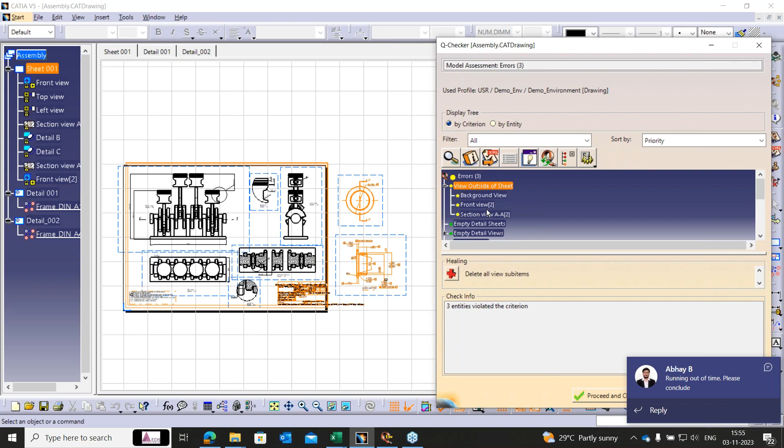So this is how we can run the PDQ system for different products and models. You can generate the results as well.

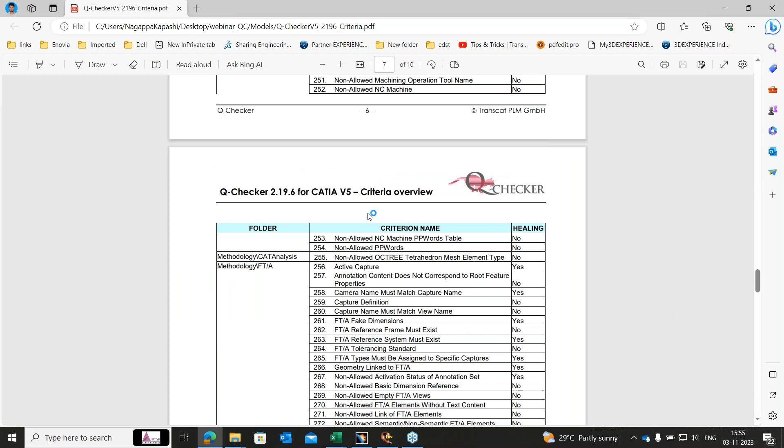You can open the results in different view modes. As Sushil said, we have an inbuilt 400 plus checks. This is a checklist of all our 400 checks.

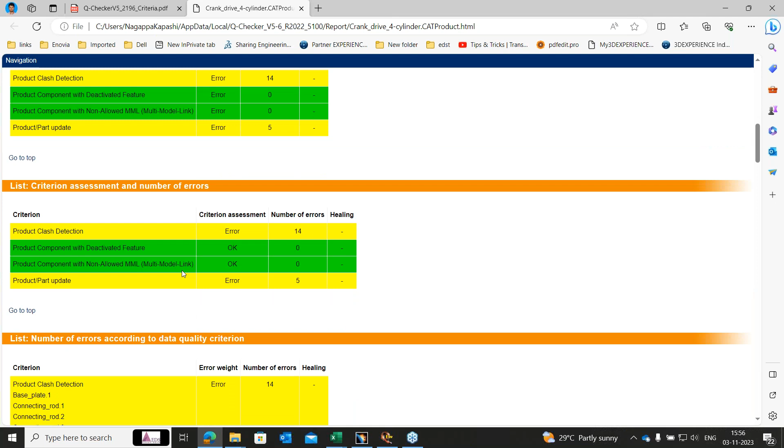When it comes to the report, we do have a very interactive, very visual report, which gives the information on what things passed and what the outcome of the assessment is. This is how we can run a PDQ system for your models.

This is all about the live demonstration of the PDQ system. Now I'm handing over to Sushil sir for the Q&A session.

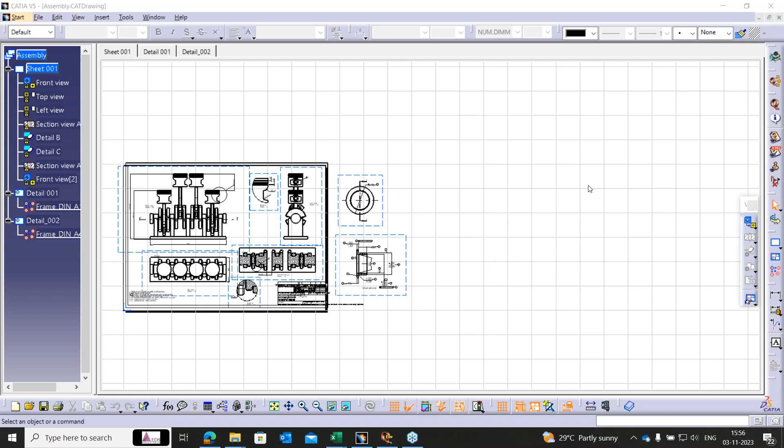I hope participants, we made the context clear. With this, the basics of PDQ I explained, I demonstrated a few slides, interesting slides, and then Nagappa, my colleague, showed the real life live demo of how it works.

Hi, hello. From my side, we presented both the basics of product data quality, and my colleague Nagappa live demonstrated how the checks are performed very efficiently without consuming much time. Based on this, I hope the session was interesting, but we would like to take your questions.

Please, thanks Sushil, we have a couple of questions which you can answer. The first question is: is it possible to add a particular new check in the existing checks which is not already listed in the criteria?

Good question, I will say, very relevant question. That's the sign of a great designer, I will say, that any intelligent designer can have his own intelligence to build on the check.